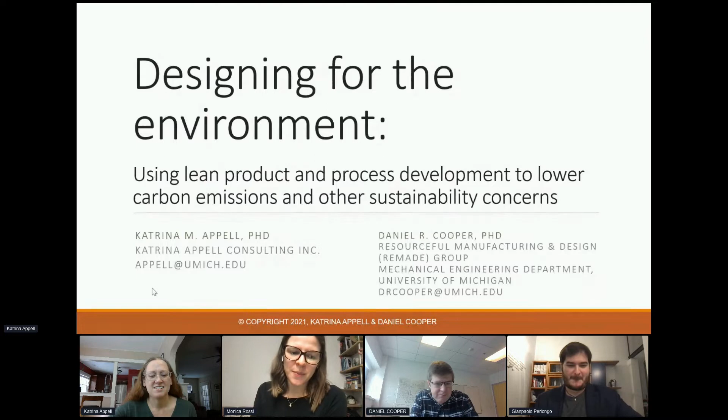To begin, let's look at the role of manufacturing and production when it comes to environmental impacts. So focusing on the biggest global issue of today, climate change and greenhouse gas emissions, these pie charts show the contribution of different sectors to global annual carbon dioxide emissions. The pie chart on the left here shows that emissions can be split roughly one third between buildings, transport, and industry. So a third of emissions coming from making stuff and 2/3 coming from using the stuff, the products that we have made in industry.

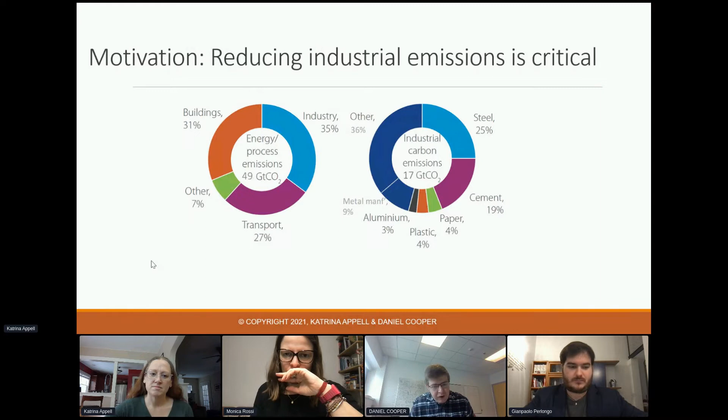Taking that industry segment, which is huge, it's a third of the pie, and expanding it out to the pie chart on the right-hand side, we can see that metal manufacturing, for example, accounts for around 10% of global industry emissions. So that's taking metal material that's already been made and converting it into products. But that pie chart on the right-hand side also shows that over 50% of industry emissions come from making just 5 key materials: steel, cement, paper, plastic, and aluminum. What does this mean for manufacturing? If you could click on, please, Katrina.

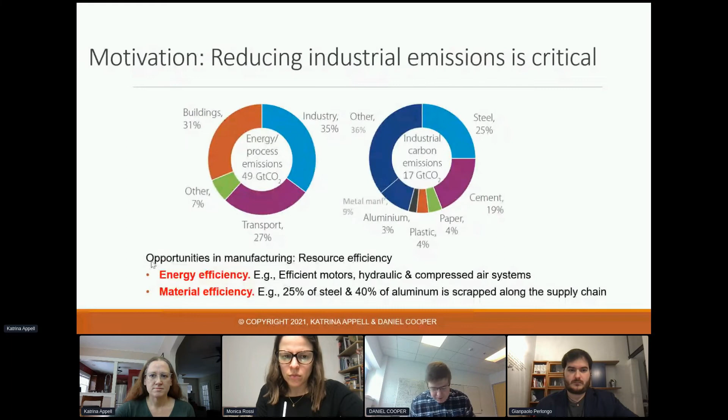Well, there are certainly opportunities to improve energy efficiency in manufacturing, and they are worth pursuing. As we can see, energy in metal manufacturing alone accounts for 10% of industry requirements. But we also need to work on improving our material efficiency. We are already incredibly efficient in how we make these key engineering materials, and we are approaching thermodynamic limits, efficiency limits in many cases. So if we want to drastically cut emissions, we are going to have to get a lot better and a lot more efficient at how we use the materials that we produce, and there's certainly scope for improvement there. So for example, around 25% of all the steel we make and 40% of all the aluminum we make globally is scrapped along the manufacturing supply chain before reaching a product and ultimately use with a customer. You can click on, please.

So what's the role of engineering design in all this? Well, just as with product lifecycle costs, it is the decisions made during the design stage that have a lasting impact on the energy requirements and emissions released from production, and also the environmental impacts of using and then disposing of the product. So, for example, design determines the potential for component reuse, product remanufacturing, and material recycling at product end of life.

Now, traditionally, it's the use phase when we are operating the product, when we are, for example, driving our car. That is traditionally where most of the emissions and the environmental impacts occur. But the efficiency of many products has been improving dramatically in recent years, that use phase. And that increases both the relative and absolute importance of production and manufacturing emissions, because these use phase efficiency improvements are often bought, if you like, at the expense of more emissions intensive production.

So just taking, for example, an electric car or a vehicle with a lightweight aluminum or composite body, that's much more emissions intensive to produce than a traditional mild steel internal combustion engine alternative.

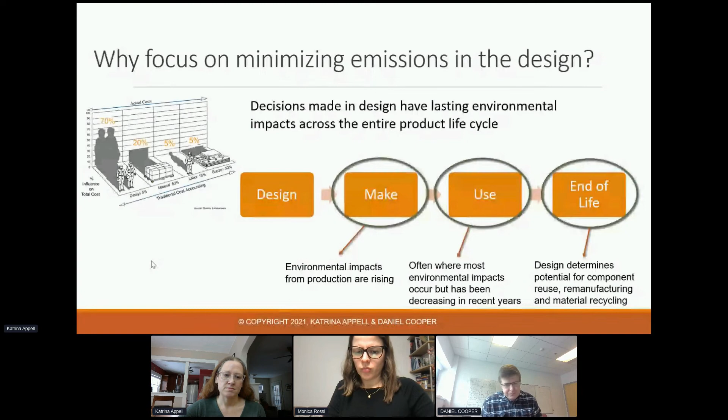Next slide, please. So designers need to increasingly consider the ramifications of their designs on energy and material efficiency in manufacturing. This is a flowchart adapted from Horton and Allwood, who are focusing on the automotive industry, and highlights that material efficiency is considered to some extent within manufacturing after the product design has already been set. And at that point, there's very limited scope for improvement.

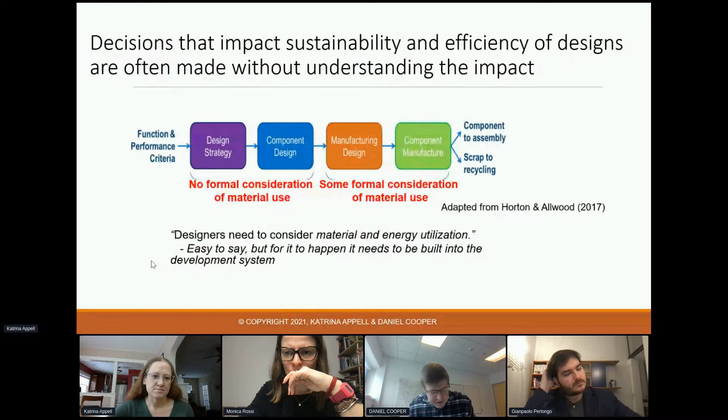But in that design stage, there is actually very little, if any, formal consideration of material efficiency. And this is the same across many different industries, not just automotive. Next slide, please. So what can we do?

Well, there are many eco-design tools available, and many of these are in the form of checklists, life cycle assessment tools, quality function deployment tools. And most of these tools, though, do not emphasize that important link between design decisions and manufacturing constraints and the environmental impact from manufacturing.

And so in this presentation, we are really going to echo the recommendations of Sutherland et al. in their recent paper on industrial sustainability, and emphasize the need to exercise systems thinking across the product lifecycle to anticipate and avoid creating environmental problems by addressing and eliminating the root cause of these problems at their source.

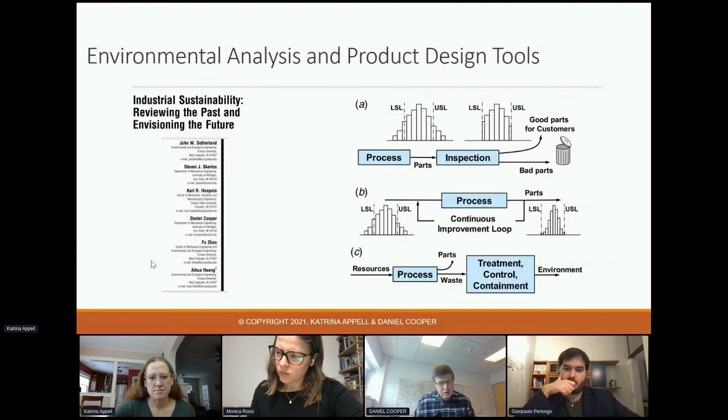And this is really a call to follow the teaching of Edwards Deming with a process control-like approach to modify or replace industrial processes to consume fewer resources and produce fewer wastes. And so, following Deming's teaching, that paper emphasized following one of his principles, but all 14 of his principles really fit together. And building off of that is where Toyota started a lot of their learning on LPPD.

And in the decades of research that have been done on LPPD since, we've now distilled down to these 5 principles that Jim Morgan introduced earlier today. These are the current guiding principles that we're focusing on, that a lot of the research is built on. And so that really is focusing on putting people first.

It's the people that bring the heart and soul to development, and they're the ones who are ultimately making the decisions and do all the work to design products and design the manufacturing systems that we want to make as efficient as possible. Understanding before executing. If we understand upfront what the product needs to be, we can then execute with speed and precision. Also understanding upfront what that total life cycle impact for sustainability is. Too often those decisions are made without understanding fully.

Synchronizing workflow. So if we understand how our work fits together, we can get the right knowledge at the right time to the people making those decisions that are going to impact the ultimate sustainability of the system. Developing products is a team sport. No product is ever developed in isolation. It's a team that works together. And so how can we create the systems and structure to enable teams to be effective working together?

Building and learning and knowledge reuse. So first of all, how can we learn as fast as possible? But then the real competitive advantage is how do we not relearn on every project and capture that knowledge? How do we capture the sustainable methods we're using on this project and use them on future projects?

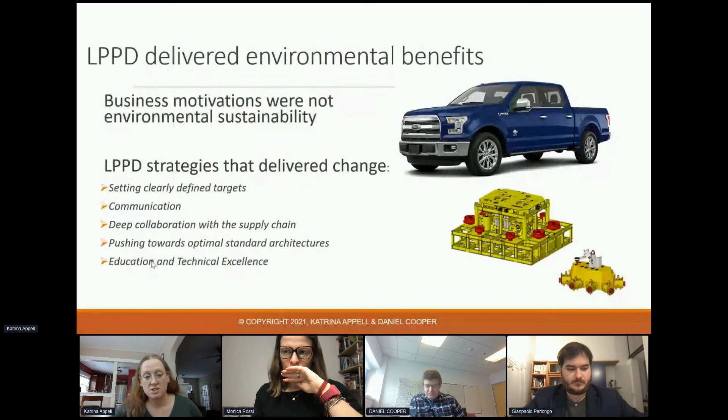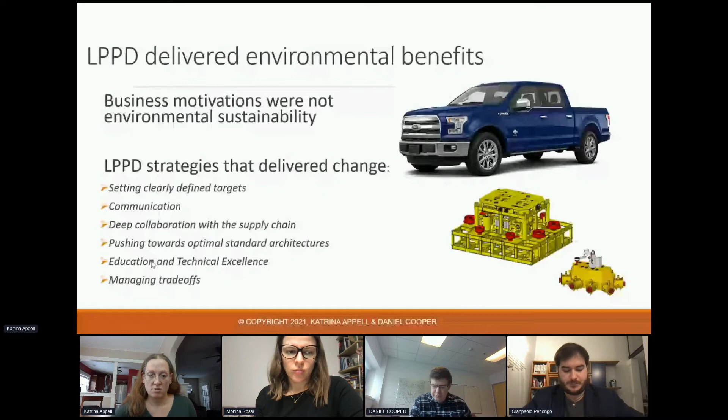Really having technical excellence to deliver these engineering challenges, how they educated people on these principles, and then how they effectively managed trade-offs, because there's always going to be trade-offs. And so what it really comes down to is how do you set yourself up for success early in the project to be able to manage those trade-offs and work effectively together as a team.

So based on these initial case study findings, we hosted a workshop at the AME conference in Chicago two years ago, in 2019. And that was attended by around 26 different industry representatives. And after presenting on these case studies, the attendees split up into small groups and answered questions around: what are the environmental impacts in your manufacturing operations? What are the opportunities to improve the environmental impact and improve your bottom line? And how can lean product and process development potentially help to deliver these benefits?

And so what we found in that session is that participants in upstream industry, for example oil and gas and material production, glass manufacturing, identified energy waste and energy efficiency as primary targets for reduced greenhouse gas emissions. So, for example, reduced flaring, heat recovery from furnaces used in material production. Whereas downstream manufacturers, essentially after the material had already been made, really identified material savings, recycling and remanufacturing as the primary opportunities for significant environmental benefits.

Several of the companies, for example an oil and gas company at the workshop, not Technip FMC in this case, reported that their projects were unnecessarily bespoke, which perhaps is not immediately intuitive, but because they were unnecessarily customized, it meant that the company actually had very little time to develop optimized energy and material efficiency designs. So there is greater potential for greater standardization and only changing where the greatest value is being provided.

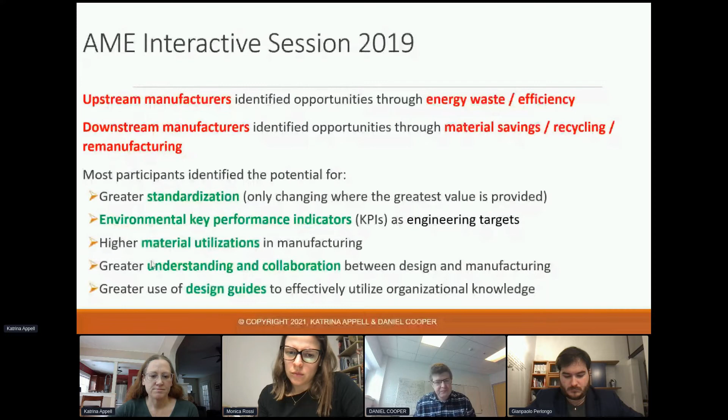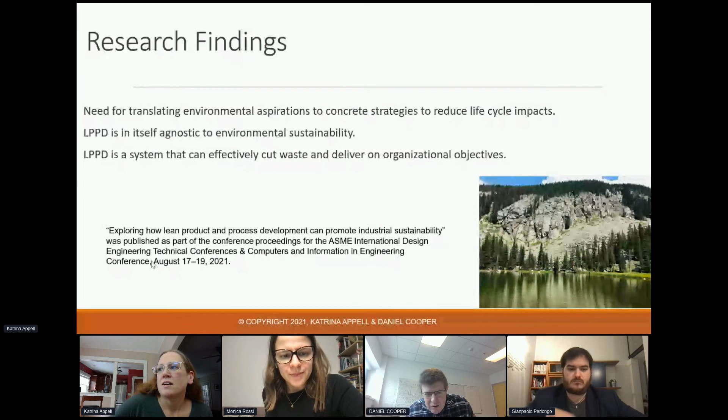Nicola is asking, how could we account or measure the impact on sustainability during the LPPD? How can I then spread it during its useful life? I think, Katrina, is that essentially what you're about to address? I think so. I'd say that this is probably the best slide to answer that question, if I'm understanding the question right, is that you really want to look at the entire life cycle across the product. And so that is across its use phase.

So with the LPPD principles, it's the decisions we make in design that are going to ultimately impact so much of the sustainability across that life cycle. And so that really starts with understanding with a life cycle assessment, to understand that use phase, understand the end of use, understand the make phase. And then from that, we can use our knowledge of that understanding when we execute the development, being conscious of those impacts and making decisions that have lower emissions or other sustainability concerns.

Upfront in design, because there's so many things that, once the design's been made, it's not easy to go back and change. If you've designed in really high carbon emissions, there are some things you can do to lower it after the fact, but ultimately a lot of those are baked in and you can't reduce them until you redesign the product on the next design. And so really focusing on understanding the impact up front so that you're making decisions that impact across the life cycle.

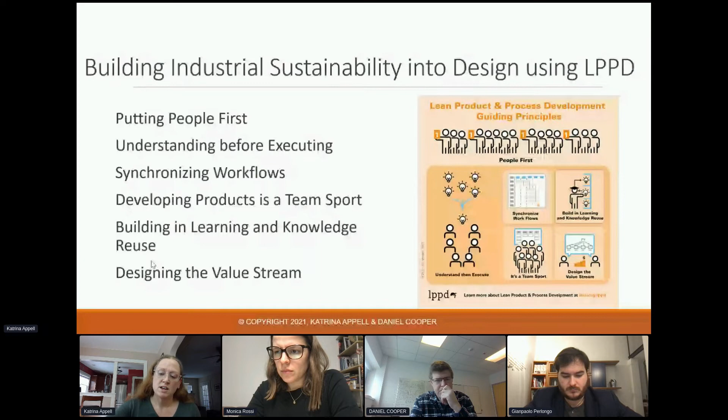Great. Well, I think I'll hand back over to Katrina. I think now you are really going to talk in more detail about how to use LPPD to translate sort of environmental aspirations into strategies. So I'll hand over to you, Katrina. Thank you, Dan. And so just focus on these guiding principles. So there's lots of tools that can be used, as Dan noted, but we really want to focus on looking at LPPD as a holistic system. What are the things that we can do to create the conditions to design for sustainability across that entire life cycle? And we'll fit those tools in as we think about all of these guiding principles.

And so that first one is really putting people first. And so a key part here is that you get better performance when you put people first. So Daniel Pink summarized decades of research on human behavior and the results. And basically, to get the best performance from people, they need to be intrinsically motivated, which is great because it's also more rewarding for them. So it's a win-win for the individual and for the business. And this is a lot of the intent when we talk about putting people first, is we want to create the conditions to enable people to perform their best and be satisfied.

So the three things people need are purpose, autonomy, and mastery. And so purpose is really, what is the value of my work? Autonomy is having some control over your work, and mastery is about how do you improve your skills. And Lean can deliver on all of these if we're conscious about it. So really, as we talk about the other principles, and anytime you're thinking about any Lean practice, whether it's to promote sustainability or otherwise, just think about how does that enable people? Because you need to be thinking consciously about the people aspects of any Lean practice or principle and how you're enabling that.

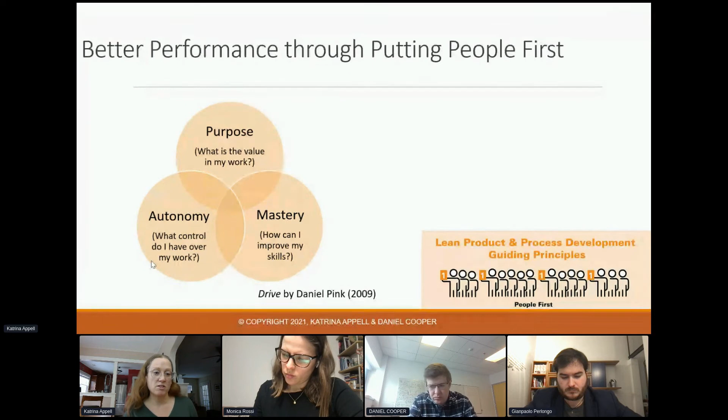So for the purpose, you can really deliver with helping people see how their work fits together to help the organization. For sustainability experts, creating a system that enables their expertise to get used up front and understood throughout the design and the development is going to help provide purpose to them. Creating the conditions to have that knowledge on how to design things that are more sustainable for everyone on the team is going to be helpful for their purpose.

And then the understanding before you execute. So some of this is understanding what those impacts are and what the decisions are that have the different sustainability impacts. But then also making sure that as we're defining what the product is, that it's done cross-functionally in the study phase of development before we execute, and then capturing that in the concept paper to really deliver as the vision and the aligning document for the development. And so we just want to make sure that sustainability is part of those upfront conversations.

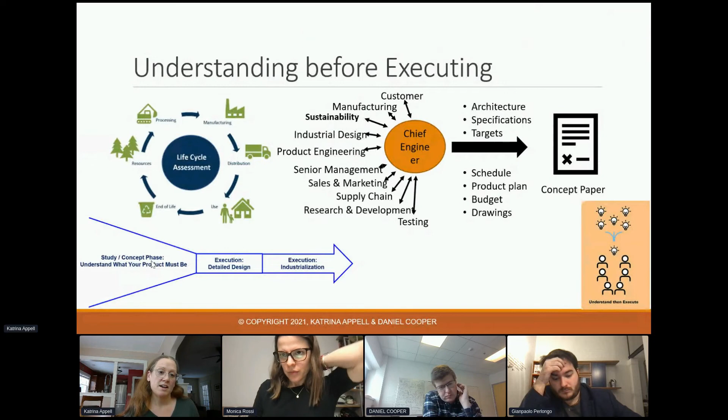There are sustainability experts within a lot of organizations, and they just often aren't involved as early in design as they should be to have the biggest impact. And then from that, once we understand what those decisions are that have the biggest impact, we want to make sure that we synchronize our work and understand that decision flow and who needs to be involved in those decisions and with what knowledge to minimize the carbon footprint or whatever objective you're trying to achieve.

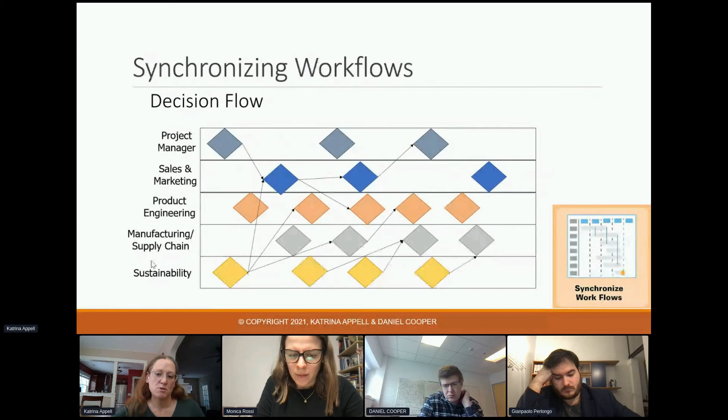How do you make sure that you understand the impact of those decisions, and then get the right people and align their work, synchronize their work so that decisions are made consciously, because too many decisions are made unconsciously because we didn't understand the hierarchy and the flow of decisions within an organization. So we really want to bring sustainability into those upfront conversations and get their work aligned. And once that's done, that's really setting the program up. All of that should be up front in that study phase.

And then how can we execute going forward? Development is a team sport. How do we make sure we're creating those conditions using Obeya, aligning our work, once we've set our targets, creating our paths to meet those targets through glide paths, and making sure that we're getting aligned and setting those conditions to work together as a team.

And then how do we build in our learning and knowledge reuse? Once we've identified what decisions we need to make for sustainability aspects, how do we make sure that we can learn the information we need as fast as possible? But once we've learned it, how do we build it into our knowledge systems in a way that's usable for future projects so that we're not relearning it going forward? And making sure that in our design guides, when we've got focus on different material aspects, there's sustainability information in there.

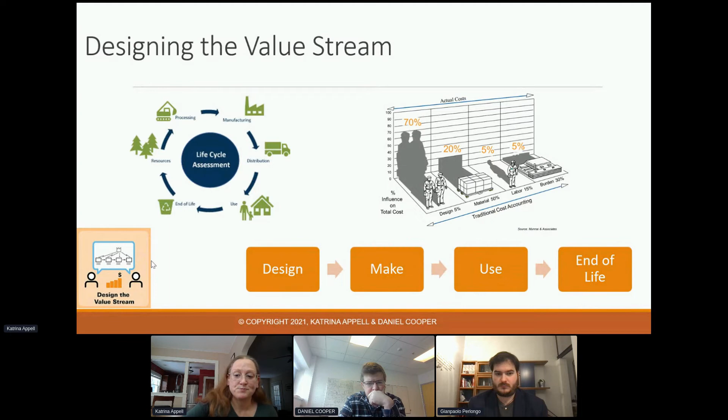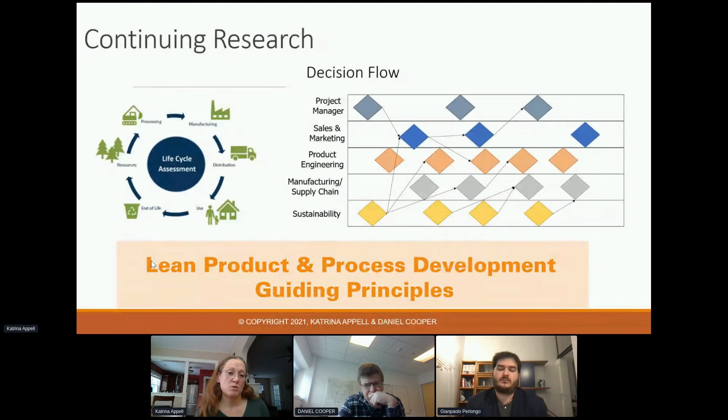And the continuing research we're doing is really focused on that, starting with understanding the impact of our designs on a current design and then laying out those decisions and synchronizing the work, getting the right expertise involved to make the best decisions, and using lean product and process development guiding principles and practices to enable the team to work together effectively to design sustainable value streams.